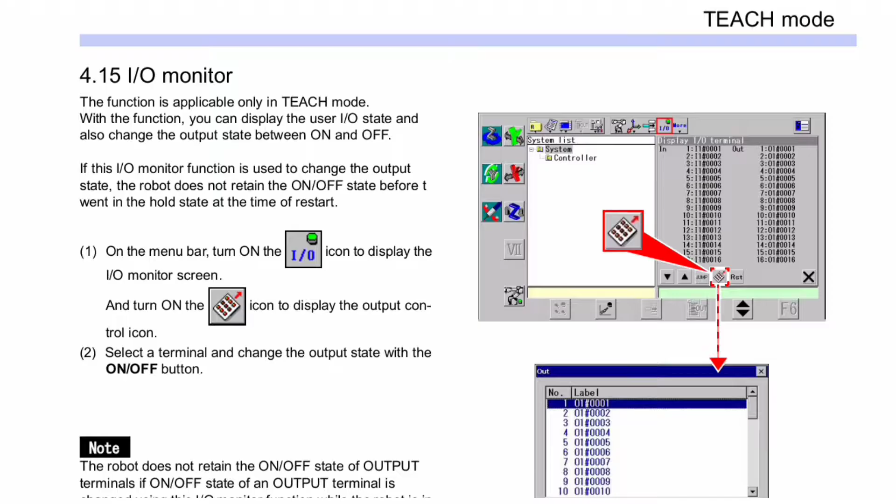This is part 13, and today we discuss the input output monitor. The function is applicable only in teach mode. With the function you can display the user input output state and also change the output state between on and off. If this input output monitor function is used to change the output state, the robot does not retain the on off state before it went into the hold state at the time of restart.

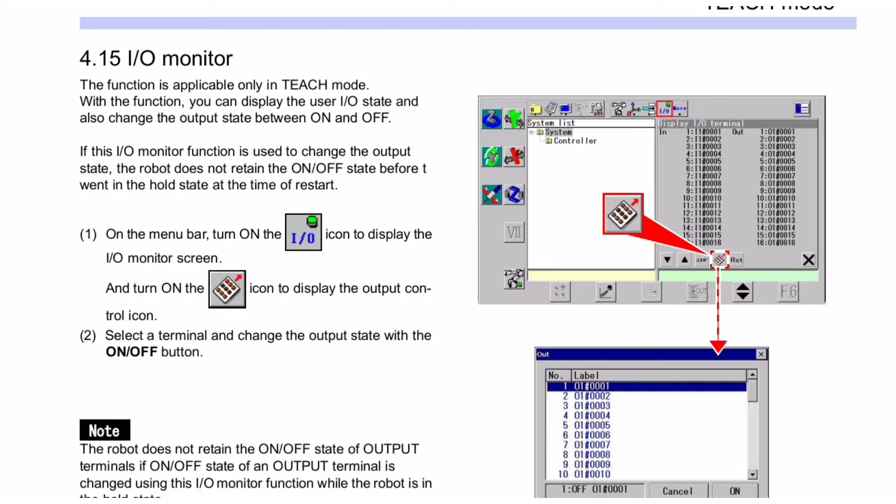First, on the menu bar, turn on the input output icon to display the input output monitor screen and turn on the icon to display the output control icon. Second, select a terminal and change the output state with the on off button. Note, the robot does not retain the on-off state of output terminals if the on-off state of an output terminal is changed using this input-output monitor function while the robot is in the hold state. This image shows the input-output monitors.

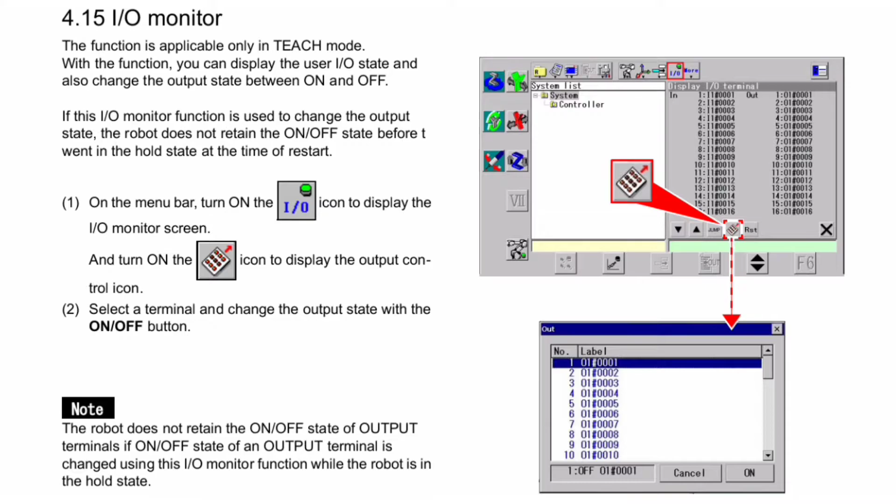Now next is program test. It is a function to test a program in nearly effective condition while the robot is actually in safe settings state in teach mode. With the program test function, it is possible to check welding operation by actually generating arc. With this function, the robot basically conducts the same operation as operation in auto mode, including flow commands such as call and paracall commands. The function also supports two robots movements.

Safe settings state in teach mode is a state that applies a speed limit to the manual override speed limit settings while the door stop function is disabled and the deadman switch function enabled. Supplementary notes. Use teach advanced settings for detailed program test settings. If the mode switch is switched to auto mode while conducting a program test, the mode is changed to auto at the current position and the robot starts auto mode operation from the current position if the program is started.

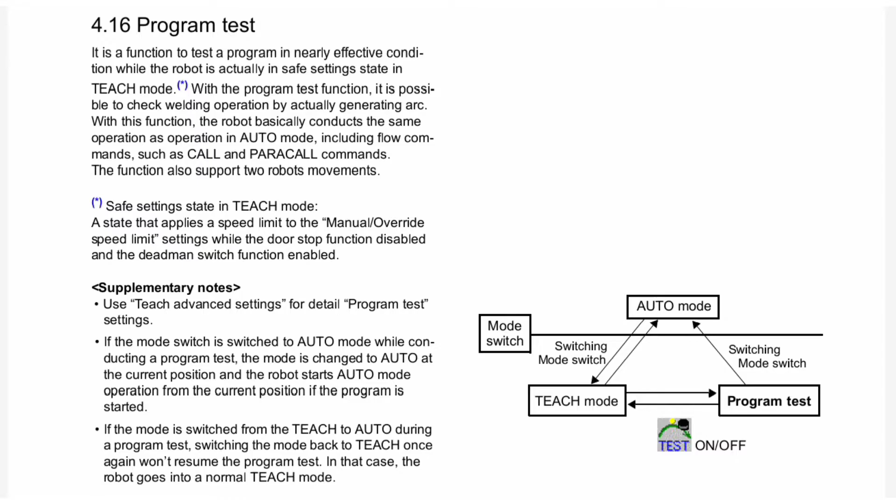If the mode is switched from teach to auto during a program test, switching the mode back to teach mode once again won't resume the program test. In that case, the robot goes into a normal teach mode. You can see teach advanced settings for program test settings in this image. In this image you can see mode switch, auto mode, teach mode, program test, test on off icon, and switching mode switch.

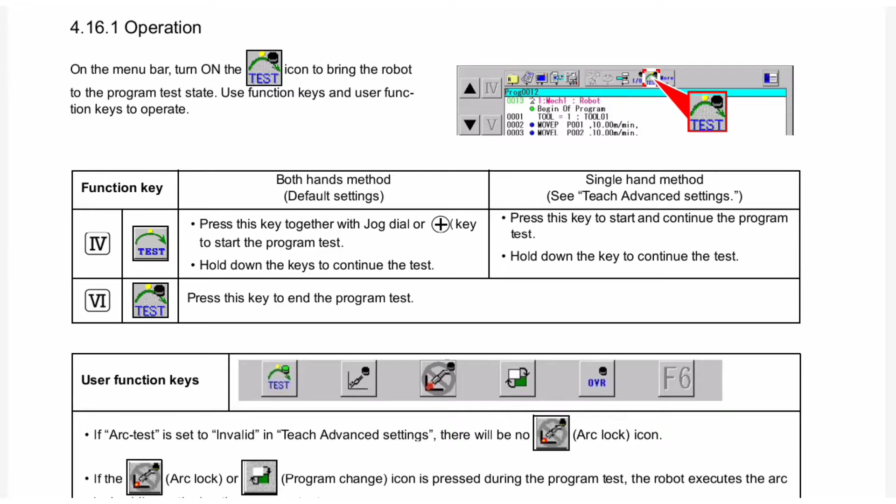Now next is operation. On the menu bar, turn on the test icon to bring the robot to the program test state. Use function keys and user function keys to operate. Function key. Fourth, test. In both hands method, default settings, press this key together with jog dial or plus key to start the program test. Hold down the keys to continue the test. Single hand method, see teach advanced settings. Press this key to start and continue the program test. Hold down the key to continue the test. Sixth, test. Press this key to end the program test.

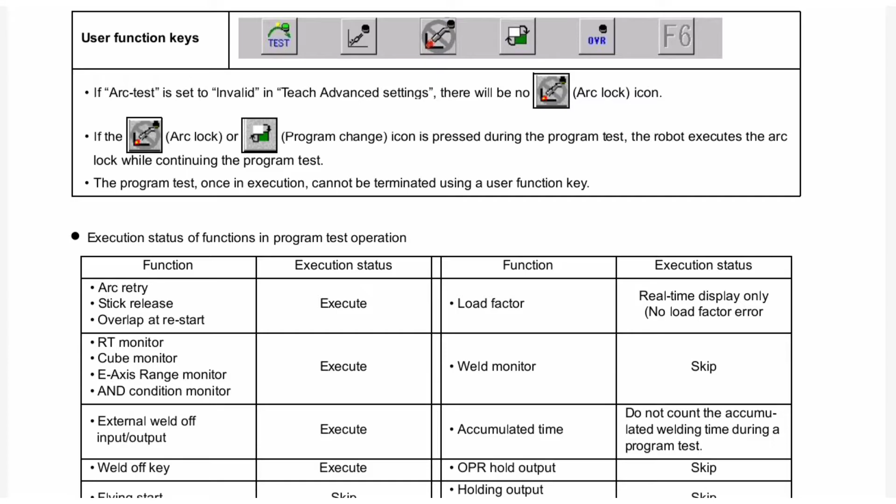Next is user function keys. Here 6 icons are shown. If arc test is set to invalid in teach advanced settings, there will be no arc lock icon. If the arc lock or program change icon is pressed during the program test, the robot executes the arc lock while continuing the program test. The program test, once in execution, cannot be terminated using a user function key.

Next one is execution status of functions in program test operation. Arc retry, stick release, overlap at restart: execution status is execute. RT monitor, cube monitor, E-axis range monitor and AND condition monitor: execute. External weld off input output: execute. Weld off key: execute. Flying start skip, override: execute. Load factor: execution status real time display only, no load factor error. Weld monitor: skip accumulated time. Do not count the accumulated welding time during a program test. OPR hold output: skip holding output, running output skip.

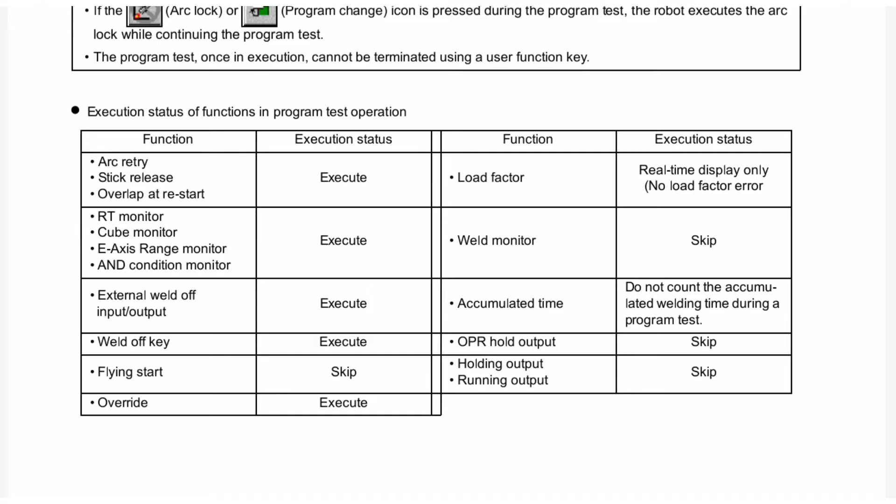Now next is override in program test. Press the user function key F5 for override. Then the override icon lamp OVR lights up and the user function icons are switched to those for override. User function keys and icons for override function: F1 switches the target welding condition of the override operation. F2 adjustment key reduces the value. F3 adjustment key increases the value. F4 determines whether to write the result of the override operation on the program or not. F5 turns on off the override operation.

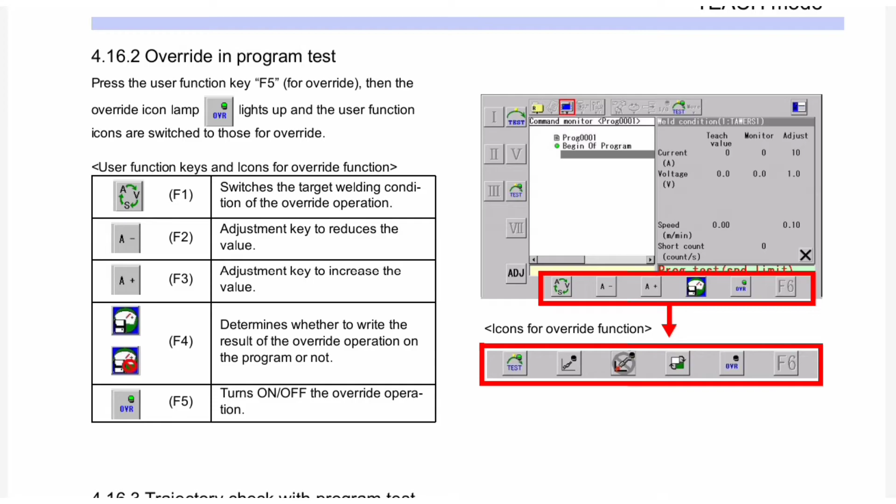You can see the procedure of override in program test in this image. All these icons, 6 icons for override functions, are indicated by this red marking.

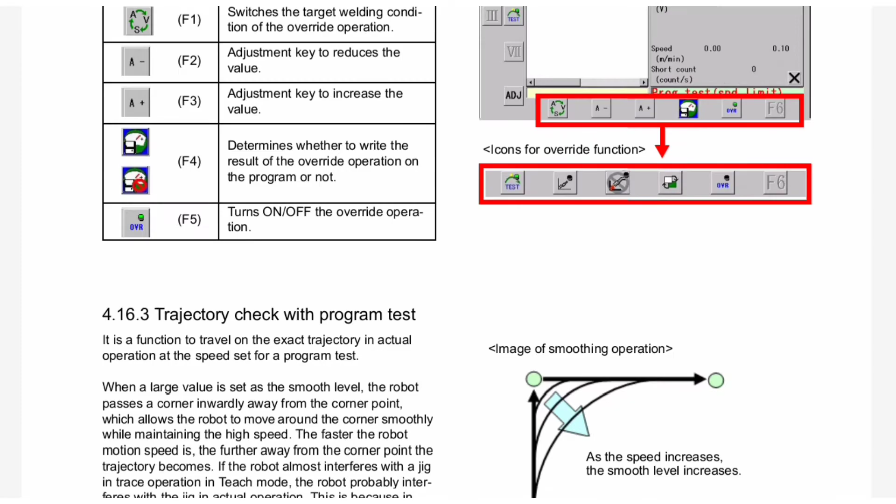Next is trajectory check with program test. It is a function to travel on the exact trajectory in actual operation at the speed set for a program test. When a large value is set as the smooth level, the robot passes a corner inwardly away from the corner point, which allows the robot to move around the corner smoothly while maintaining the high speed. The faster the robot motion speed is, the further away from the corner point the trajectory becomes.

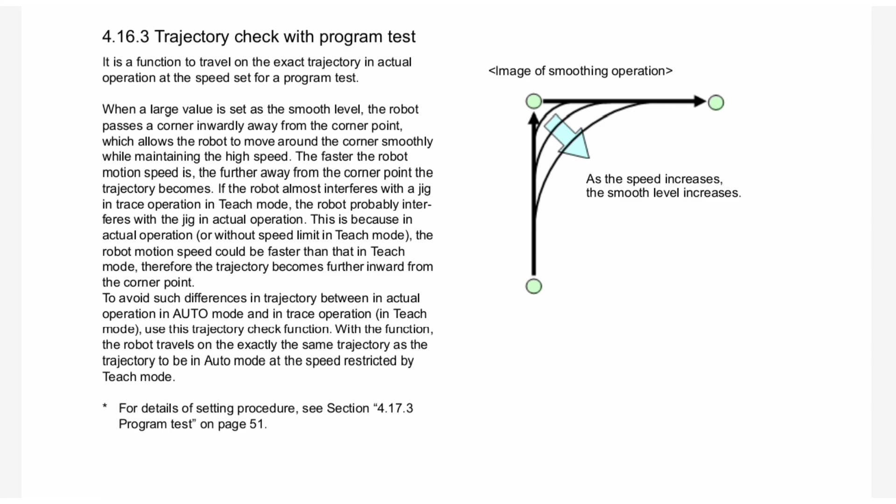If the robot almost interferes with a jig in trace operation in teach mode, the robot probably interferes with the jig in actual operation. This is because in actual operation or without speed limit in teach mode, the robot motion speed could be faster than that in teach mode. Therefore, the trajectory becomes further inward from the corner point. To avoid such differences in trajectory between actual operation in auto mode and trace operation in teach mode, use this trajectory check function. With the function, the robot travels on exactly the same trajectory as in auto mode at the speed restricted by teach mode.